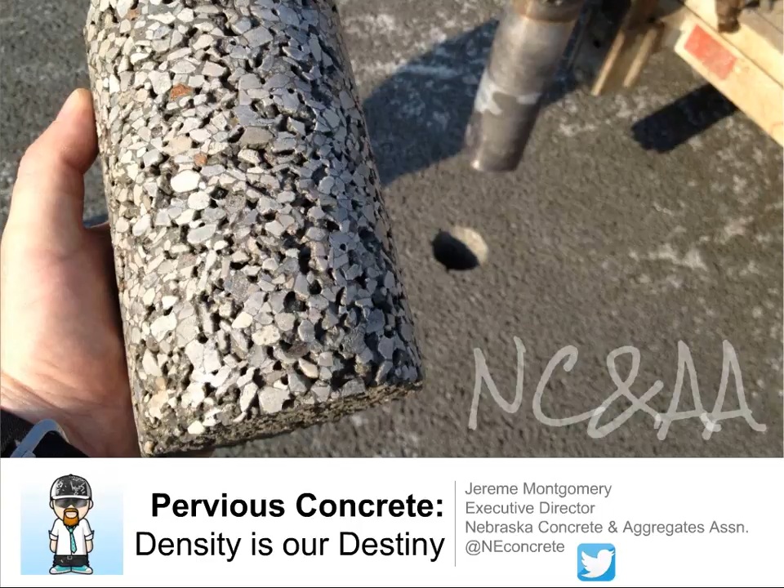Welcome to our webinar entitled Pervious Concrete, Density is Our Destiny.

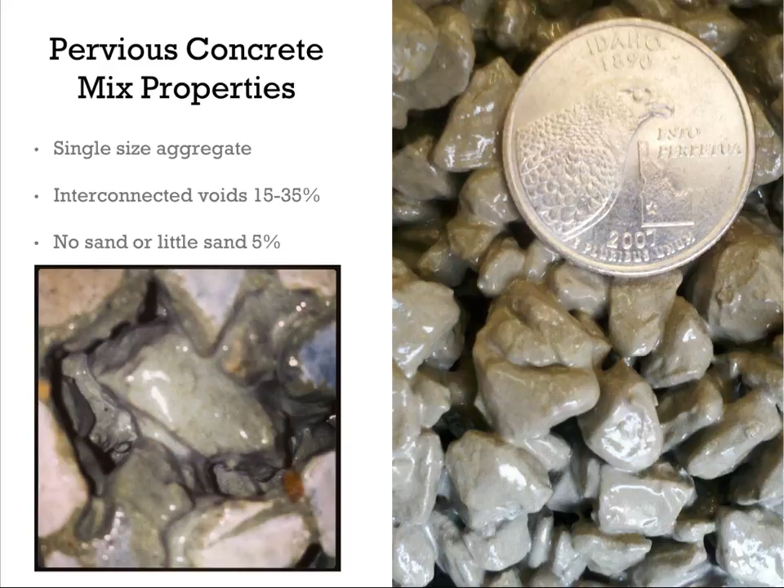So even at the same void content, you're going to have a different unit weight or density between a fresh and a hardened specimen, given the same void contents. And we'll talk about that here in a little bit. All right, so why is density so important to understand? Well, if you can control fresh density, you can control strength, infiltration, and in my own personal opinion, durability.

So in about 2007, I'm sitting in the audience and I'm listening to a guy by the name of Bruce Ferguson. Bruce Ferguson actually wrote the book on porous pavements back in 2005, and he's standing there, and I remember this slide very vividly, where he says pervious concrete is a balance between hydrological and structural properties.

And I sat there and I thought for a second, and I said, well, it's a real fine line there, and what he's saying is you want the pavement designed to be able to have water go through it, but not so much that you're going to lose the structural properties that are going to hold up traffic, be durable to turning tires, freeze thaw, all those different things.

So I think if Bruce and I were to meet today, I think what he was trying to say was density is our destiny. And I know that's a nice little catchphrase, but I really believe that density has a lot to do with the future of our market in pervious concrete. And as I talk to contractors here today, one of the biggest things I feel is important is that you understand what you're accepting when that truck delivers. And how do we understand what we accept and what we reject as far as the fresh properties go.

So pervious concrete isn't just a pavement. It's a stormwater management system. We use it in parking lots. We use it in sidewalks, trails, driveways, even behind retaining walls, all sorts of different applications. One of the main ones, though, is parking lots because, of course, it has the most square foot of impermeable surface, which takes all that rain and goes to the storm sewers. So what we're trying to do is treat it and retain that storm water on site by using it in something like parking lots.

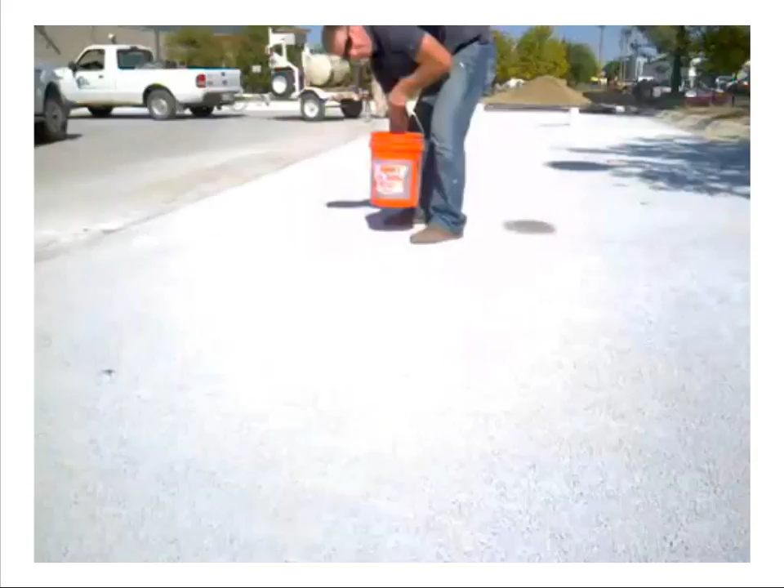I'm going to show this nice little video, and I'm going to actually play it twice. First time I want you to take a look at it because I know a lot of you out there have this vision and you've seen this YouTube video of a guy with a bucket of water and he pours it right on the pervious concrete and it goes straight through. Now I really think that's kind of screwed our industry because now this is what owners think permeable pavement should be. Almost like a drain. It should go right through it.

But I'd like to take that myth and challenge it a little bit. And here in Nebraska, what we like to do is sacrifice infiltration for density. We're going to get our pavements a little bit more dense, and we're going to sacrifice that infiltration. So when we build our pavement, go ahead, and here's the water. I'm going to pour it on there. And what I like to see is it dispersing and then kind of soaking into the surface.

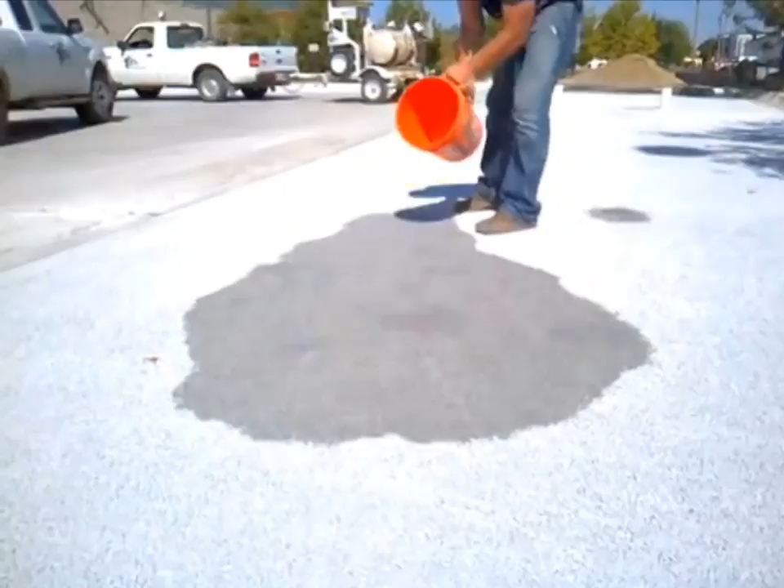And I know because we did an ASTM infiltration test at this location, and it measured about 300 inches an hour. But with that bucket going straight through the pavement, I guarantee you that's plus 1,000, maybe even 2,000 inches per hour. And I just don't think that those pavements with that kind of infiltration are going to be durable and withstand turning tires, freeze-thaw cycles, and all that other good stuff. So we've made a conscious decision to sacrifice infiltration for a little bit more of a dense pavement.

And again, I'll show you this one more time. And I really would have loved to show you guys a lot of videos, but I know with these webinars that gets a little bit tricky and sometimes may blow up in my face.

So this is the only video I'm actually showing today, and I wish I could show more, but nonetheless. So again, we're sacrificing infiltration for dense, durable surfaces. So if we can go back to the presentation, we'll go to our next slide.

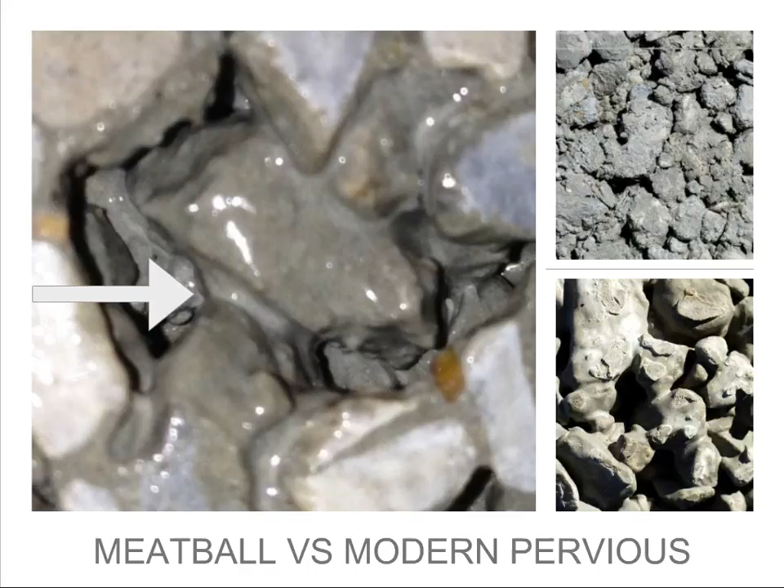And on that big picture there, that's actually a picture of a core I brought home from the testing lab, and I have it actually under the sink of my kitchen. And my wife walks in, and she's like, "What the heck are you doing?" And I'm looking for different things and clues, and I'm looking at that paste. Is it smooth? Is it the bond between the aggregates? Do I have this concave feature that's bonding the aggregates together? And that's an indication that I have good moisture, good hydration, which means a good glue holding all these aggregates together. All right, so that's enough about the mix.

If you're under 18 years of age, you can open your eyes now.

We're back on track. But what I'd like to talk about now is some construction techniques, some tools and the considerations that we take during the construction of these pervious concrete pavements. And if you don't have any experience with placing pervious concrete, you're soon going to learn that it's much like conventional concrete. You still have to place it. You still got to strike it off. You still got to finish it. Yes, I said finish it. Still got to cure it. Some of you may or may not know what curing concrete means. I'm a big cure guy. And of course, we still got to joint it and cut it.

And one of the things that I did leave out of that whole placement that's kind of like conventional is consolidation. We can't vibrate anything because then definitely we're going to get some clogged pores and the pavement may not be able to drain. So everything that we do with pervious is usually by weights or rollers, and I'll show you some of those tools here in a second.

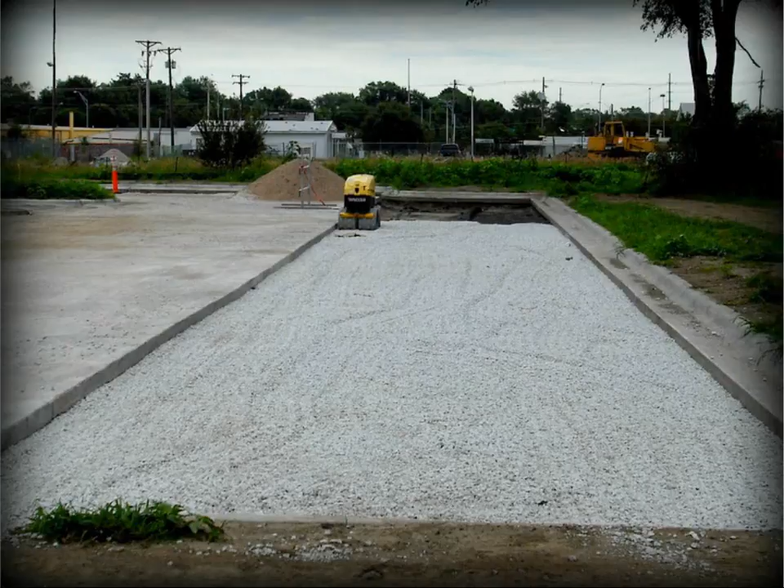When we talk about sub-base, subgrade, I try not to be too much of an expert on this because I'm not a soils guy, I'm not a sub-base guy, but what I do know is in Nebraska we use about an 18-inch rock base. And this rock base is kind of like your 57 stone. It has about 40% voids in it, and that 40% voids is storage area for stormwater before it has time to percolate back into the soils or go to an outlet.

But this sub-base, one thing that I've learned is it has to be uniform. It doesn't have to be strong, just a lot like conventional concrete pavements. We don't need strength in our sub-base, but we do need uniform strength.

And so 18 inches seems to work well for us. We started with about 12 inches. It seems because of the frost depth and stuff that just wasn't quite deep enough. And 18 inches seems to be the minimum depth that we use for our sub-base subgrade.

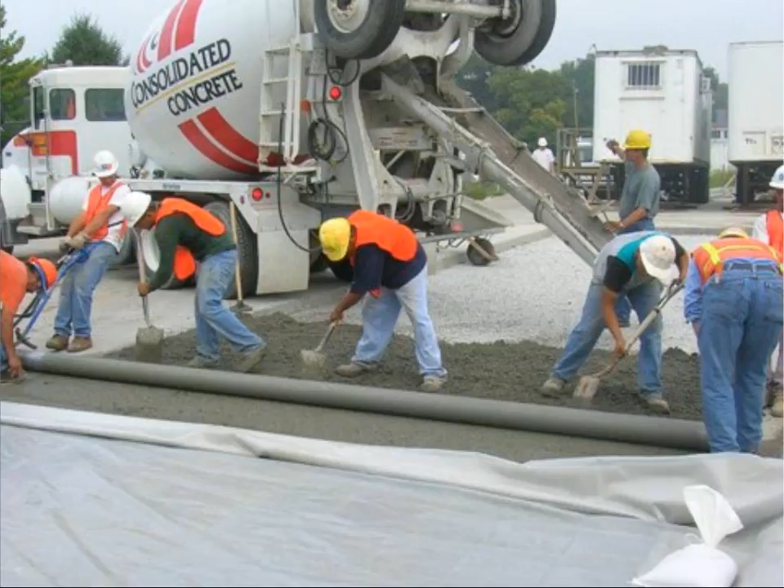On this next picture, I want to show and talk a little bit about the placement procedures. Yes, of course, you can put it out of the back of a chute, but it takes a little bit more time. The more chutes you add to the truck, the less of an angle you have coming out of the truck, and therefore the slower it's going to come out. I can tell you on this project, that guy in the yellow hard hat that's running the chute literally probably pushed 100 yards of pervious concrete out of that chute. So it can be done, although it's not one of my favorite placements of pervious concrete.

The other thing I don't like, if you look at this picture, I don't like those truck axles right on the edge of the conventional concrete. I really think that's putting a lot of stress and strain on that, and could lead to some mid-panel cracking due to loads. But we've also driven the trucks right on the sub base also, and done it out of the back of the truck as well.

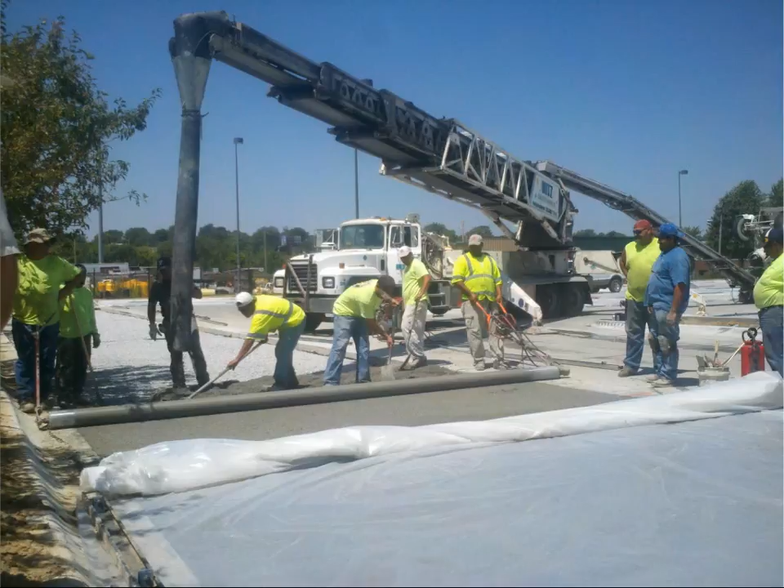My favorite placement method is with a conveyor. Of course, it's easy for me to say that. I'm not paying for the tab, but I've noticed our production has gone up when we use a telebelt because you're not worried about getting trucks in and out. As soon as one truck is done, the other one backs up and we're ready to go again.

The other thing I like about a conveyor is it actually is dropping it down about 15 feet. And that's getting a little bit more compaction, a little bit more of a dense material being put down versus out of the back of a truck where you're literally just pushing it down the chute and almost laying it down.

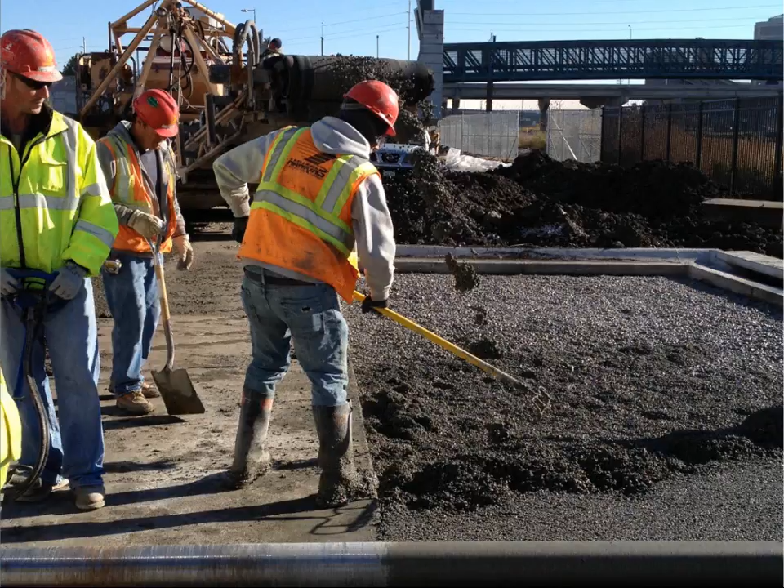When it comes to another placement, this is kind of a funny story because I attended this pre-con meeting where I told this contractor, well, I prefer a conveyor. And he goes, oh yeah, we got one of those. And I showed up the next morning when we were going to place the pervious, and he has this, what he calls, I think it was an MTP placer. It had an auger in the back. It was something I was completely unfamiliar with. It made me very nervous. But lo and behold, it actually was a very good way to place that pervious concrete, and worked out like a champ.

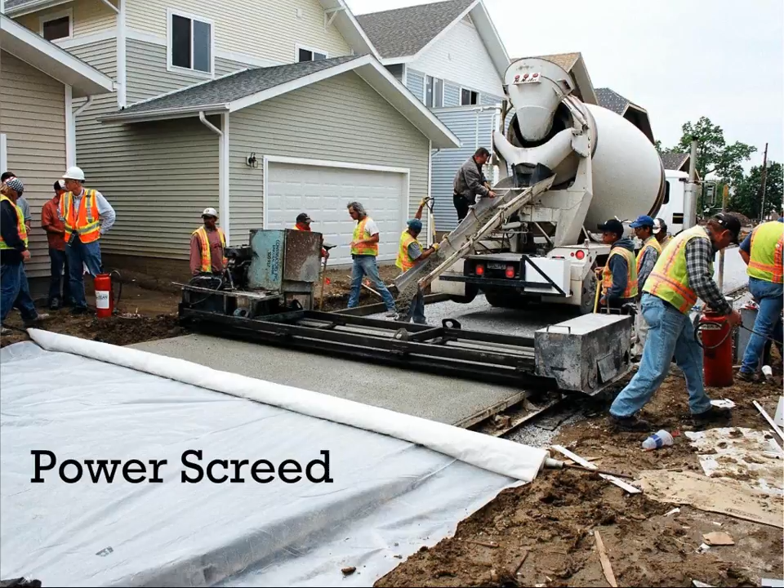Some of the methods of striking pervious off: of course, we can't use vibration, so everything we use is usually roller screeds. This is one of the first pieces of equipment we used in Nebraska called the power screed. It actually has 3 rollers on it, 2 rollers that sit on top of the forms, and the third roller, which is in the front of the screed, that's usually raised up 3/8 of an inch or so to knock everything down, and then the other 2 rollers literally compact by weight the surface of that pervious concrete.

One thing that you should notice here as well, with all the pictures that I'm probably showing today, is the location of that plastic, that curing membrane that we're using right behind strike off. Because this stuff has such a low water cement ratio, we have got to maintain moisture in the paste, especially at the surface of the concrete, to make it strong and durable. But that's what we call the power screed.

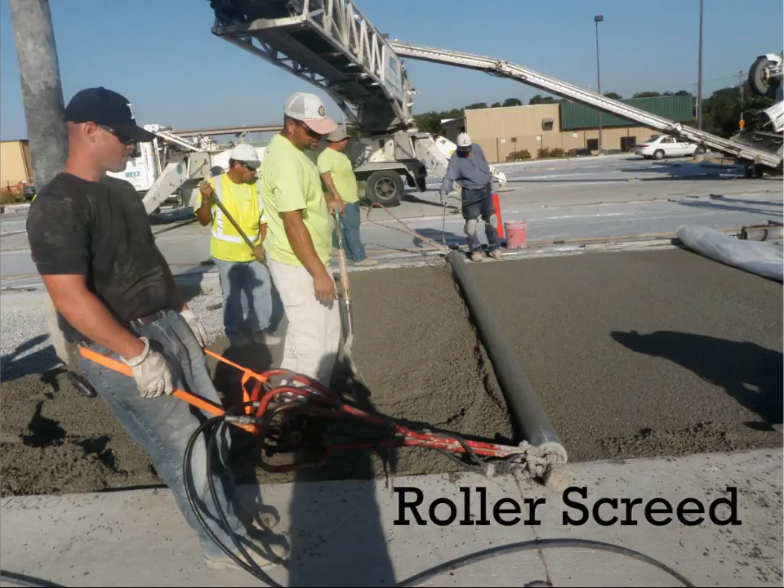Probably the most popular tool to strike off pervious is the single roller screed. It's a 6-inch tube, usually hydraulic, or I've seen some of them that are gas powered. You know, this roller as it goes, it's trying to get away from you and you're pulling it back. I kind of like this picture where these guys used tie downs around their waist to help them pull, because I've always said if you're going to have 2 guys pulling a 20-foot wide strip of pervious, you want your 2 big boys on those ends, because it'll wear your hands down by the end of the day.

But again, look where the plastic is. It's only 10 feet back from strike off. We're maintaining that moisture the best that we can.

And I wanted to put a little bit of something in there about edge work. We can edge it. I've edged it with a 1/2-inch edger. You need these mixes to be a little bit smaller with the aggregate size. And one of the things that I try to communicate to these crews is if the pervious concrete mix is sitting in the curb, don't put it back in the mix. Once it's out, it's out.

I always bring back shovels of a little bit of fresh pervious to work that edge. But once it's out of the edge, don't ever put it back in. It just seems like those edges end up being dry and end up raveling. But you can edge it with a 1/2-inch edger, but our mixes are about that 3/8 minus, which is a lot of 1/4-inch aggregate. I think when you start getting into the 1/2-inch aggregate, then it's really tough to put a nice 1/2-inch radius edge on that.

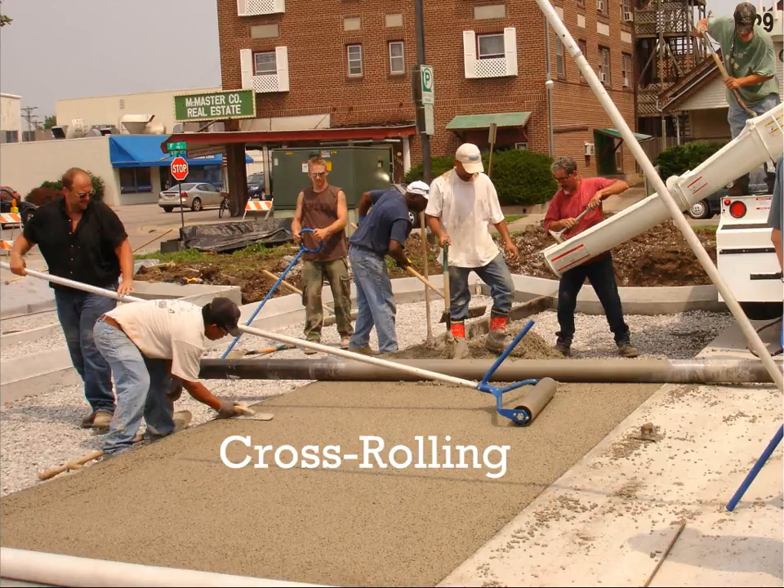Cross rolling, this is a tool that we use that's typical with, I call it the bull float of the pervious concrete world. When we first started cross rolling, we would do it to remove the lines of the roller screed, and we did it before the plastic was down so we can see everything. But the mixes that I've used are pretty sticky mixes, so they have a tendency to stick to the tools and whatnot. So a lot of the cross rolling that we do now is right on top of the plastic, which seems to work really well.

One of the side effects of this is the guy running that cross roller really has to ensure that he's doing everything he can to cover every square foot of this, because you can't see your roller lines. You just got to make sure you're being consistent with that roller going down the line. But again, look at where that plastic is, right behind the roller. Just doing an excellent job maintaining moisture.

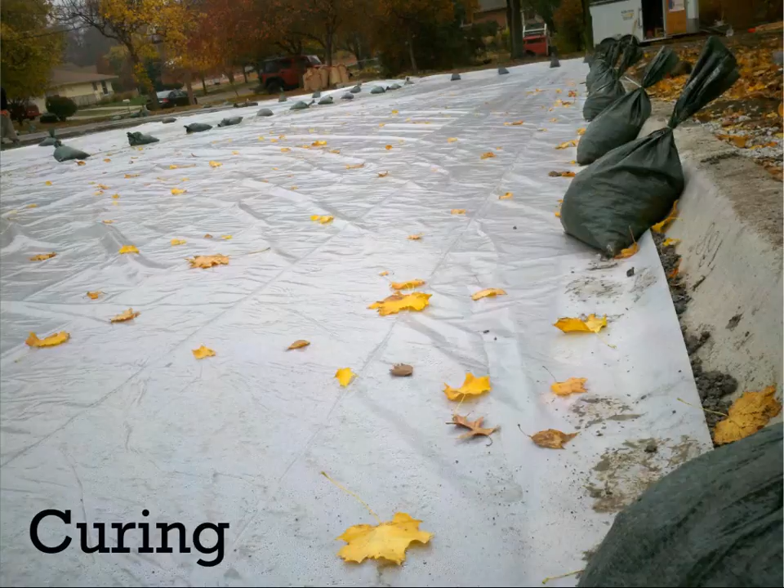Curing. Now, if we were talking about conventional concrete, I'd have to go on a whole new hour webinar on why it's important to cure concrete. I'm just a big advocate of it. I think one of the basic fundamentals of placing even conventional concrete is maintaining moisture and maintaining temperature. Now, when you're talking about pervious concrete, our mixes have around that 0.35 water cement ratio, so it's extremely low. If I want that paste to be a strong glue that holds these aggregates together, I have got to maintain that moisture at the surface, or moisture throughout the mix, not just the surface.

But one of the things that we do in our pre-construction meetings is we discuss how are we going to hold this plastic down for 7 days. Because 7 days is a long time here in Nebraska. It's pretty windy. So we got to make sure that we're doing everything that we can to hold this plastic down to make sure that it's not going to blow around and dry out the surface of our pervious concrete.

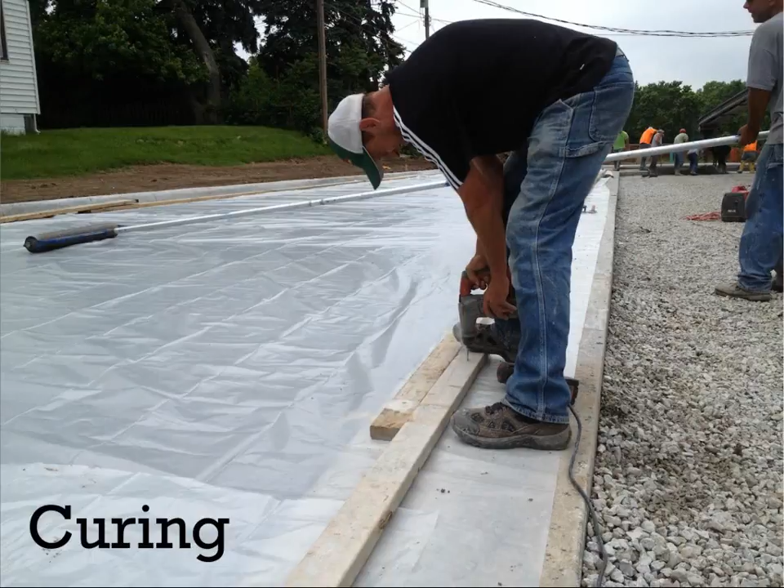What I expect now from my crews, I should say the crews that allow me to come in and guide them, is that I require a mechanical fastening of this plastic. Because even with sandbags, it becomes extremely challenging to keep that plastic from acting like a parachute. So in the last few projects that we've done, we actually came back before we were done placing and mechanically fastened that plastic down. What he's doing here is a header curb, but the integral curb, header curb, wherever you got to fasten it down to, let's make sure we're keeping it down for 7 days.

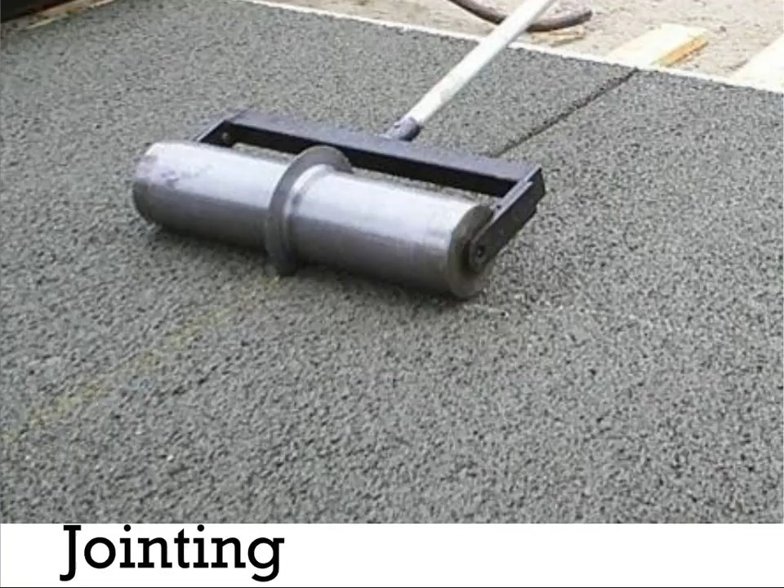Jointing. Now, this little tool here is my arch enemy. I do not like the jointer. This is what we call the groover or the pizza cutter. We were using this to hand groove our joints in pervious concrete, I would say probably 2006 and 2007. And again, we just haven't had the durability out of these joints using this jointer like we do with a saw cut. But back in 2006, 2007, I had a lot of people doubt whether or not you could actually saw cut pervious.

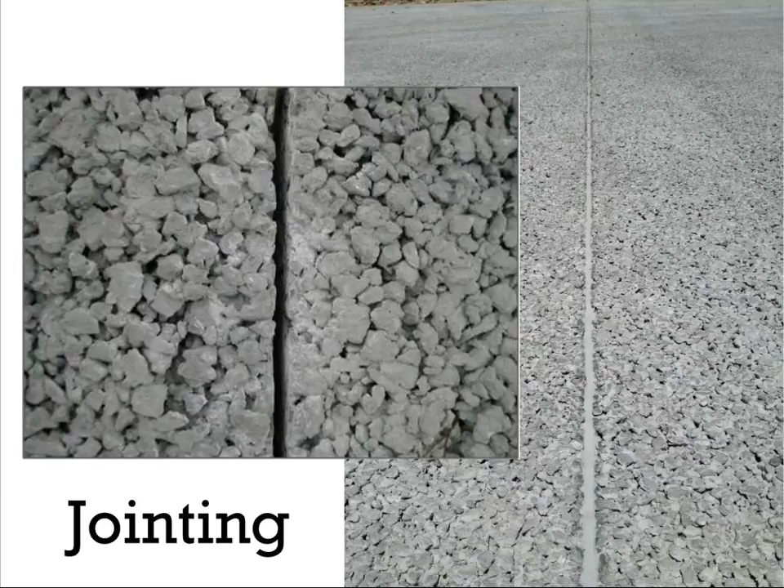But since 2007, we've actually done a great job with saw cutting pervious. The question becomes, at what time do you cut the pervious? Because remember, we've got that plastic down. We want to hold that plastic down for 7 days, not let the surface dry out. So do you come in a couple days later, uncover it, then cut? Some of these times we've actually waited 7 days before we cut, but it was a little cooler outside and we thought we can get away with that.

Another thing that you see in this photo is something very unique, is the sealant. I used to have a picture where I did these box lunches. I used to make fun of this picture, pervious concrete with sealed joints. I just thought it was the funniest thing, the biggest waste of money I've ever seen. But there's two reasons why we seal joints. One is to keep out moisture, which is ridiculous for pervious concrete. And the second reason is to keep out any kind of incompressibles.

And especially with pervious concrete, as you take that saw blade down there, you're going to have thousands of little rocks that are just kind of hanging on there. And you don't want those falling down, thermal expansion, thermal contraction, just eating away at that joint. So our detail now is to saw cut and to seal the joints. And I will tell you that it is a night and day difference from grooving those tool joints to saw cutting and sealing them. Just a dramatic difference in durability.

Now, in the defense of the groover, this was still back when we were still using very dry mixes. What I hear nowadays is people using the wet mixes and using a 3 mil plastic that goes over the top and grooving it over the top of the plastic. And it seems to be working real good. I would like to use the groover on some of the mixes that we've developed recently because they're a lot more workable and probably a lot more durable today than I gave them credit for in 2007.

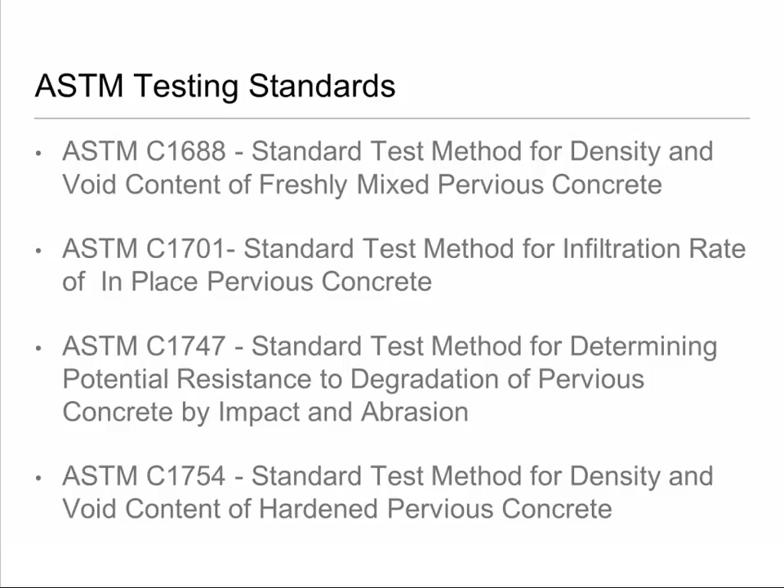But is this telling us what we're placing in the field? And my answer is no. It is not testing the density of what we have in place or the void content of what we have in place. It's only telling you the density or the unit weight per the standard. So per the standard meaning 2 lifts, 20 blows per lift, striking off, weighing it. It is not a representation of what we're putting in place, just per the standard. Here is a picture of ASTM 1701, the old infamous infiltration test.

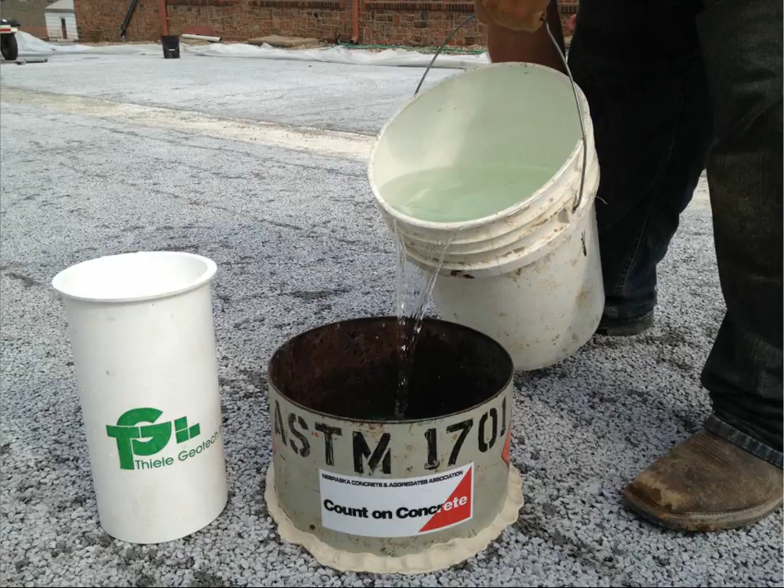This is a test. It's a 12-inch ring. You do a pre-test; depending on how fast it infiltrates on your pre-test, that dictates how much water you use on the actual test. We've done a number of these. I really like to see somewhere in the range of 250 inches an hour all the way to 750 inches an hour. I think when we start getting higher than 750 or 1,000 inches an hour, we're just talking about a very high void content slab, which is great for hydrological purposes but may not be so good for structural purposes. So there you go with ASTM 1701.

Something else with this 1701 test, a lot of people don't understand that it is not a test for acceptance. So let's say we ran this test and it showed 50 inches an hour. Do we accept or reject based on this test? No, we don't. We use it as information. What we do here in Nebraska is for every 5,000 square feet, we'll go do 3 of these infiltration tests on a brand new slab.

We'll document where we did that in the slab. And then 3, 4, or 5 years down the road, we can actually do the same test in the same location to understand how much infiltration we've lost, when maintenance is going to be needed, and so forth. So we use it for information purposes, not for acceptance.

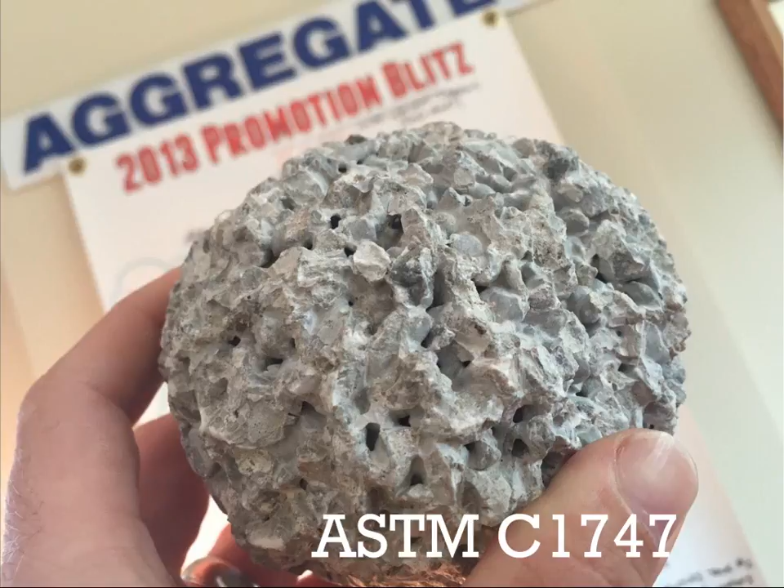ASTM 1747 right here looks like a popcorn ball. We've run this test twice with our basic mix, which is just rock, cement and water and some admixtures. But again, this is not an acceptance test. We've run 2 of these tests. As a matter of fact, I have Terracon right now with my 3rd set of specimens to run this test.

And basically you take 3 specimens that are 4 inches tall at exactly 20% void content. You tumble them in an LA abrasion machine, and you really just beat the snot out of them until you go through 500 revolutions. You measure mass loss, and our specimens have about 35% mass loss. And everybody goes, well, Jeremy, that's an awful lot of mass loss there. That can't be a good mix.

Well, in the future, when we start adding fly ash, fibers, silica fume and all these other types of value-added products, we'll be able to do this test again to see how much tougher those value-added products make this mix. Think of our mix right now as just the basic standard mix, and it can always be improved on, but we're not quite there yet. But this test is not for acceptance. It's just more for information, telling me how tough my mix is.

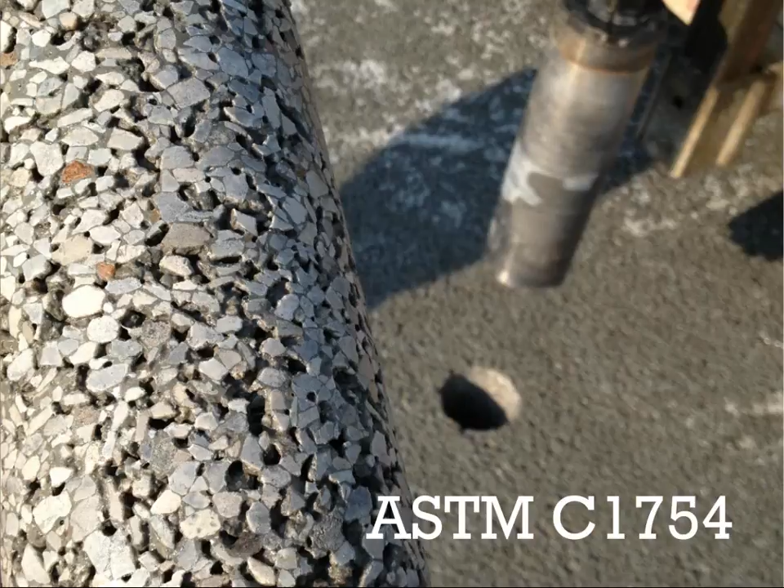And then, of course, another disclaimer for anybody under the age of 18. Again, close your eyes. This is more concrete porn. Matter of fact, if this was in a magazine, it would absolutely be the centerfold. I have this poster on my wall of this exact picture because I call this the money shot.

It's ASTM C1754, testing the hardened density and the hardened void content of pervious concrete. And this is one of the things in Nebraska I take a lot of pride in. I feel like we are one of the only ones that can prove we are predicting in-place void content. If you want 20% void content, we can place 20% void content given tolerances, pluses and minuses, but we can hit it pretty good, and I'm going to explain that in my quality control segment.

But again, ASTM 1754 is only a few years old, so we need more people out there running these tests so we can get those ASTM committees some information on how we're doing in the field. So a lot of people also ask me, well, Jeremy, how do we accept pervious concrete when that truck shows up? Well, in accordance with ACI 522.1-13, meaning it came out in 2013, a relatively new update to the specification.

And just so some of you know, I actually do sit on this 522 committee. When people ask me for specifications, I always direct them to ACI 522 because it's a group of people that sat in a room for years, literally years, and argued about every little word, every little tolerance, every topic in these. And it's from academia, contractors to producers, all coming together to create a specification, and you just can't get any better than that.

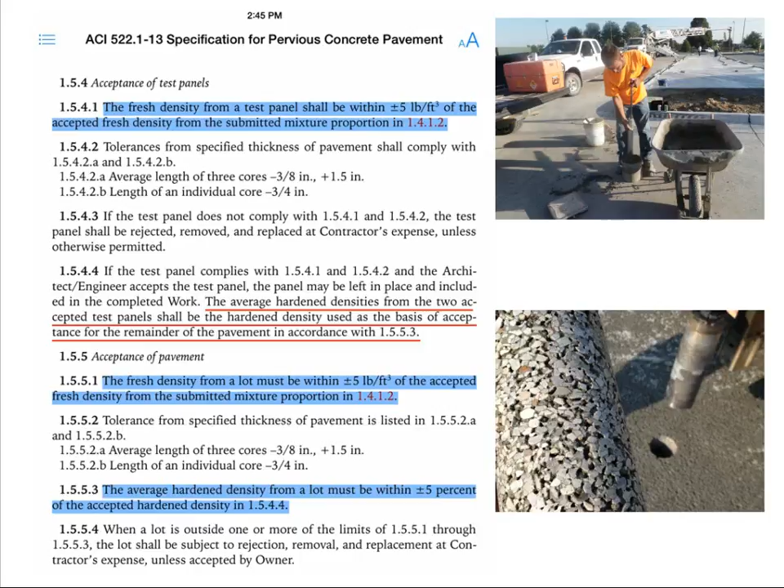So our QA/QC program here in Nebraska is a little bit different. I actually require a lot more than what ACI 522 requires. If I can get my foot in the door soon enough, I require a pre-bid meeting, and I sit in with 5 or 6 contractors that are bidding on the project, and we talk about, how are we going to hold the plastic down? How are we going to place it? Maybe you should bid it with a telebelt. Maybe everybody should bid it with a telebelt, because I think it's just going to be a little bit easier to place, your production better, and I think you're going to actually end up saving money when it's all said and done. But in the pre-bid, we also talk about 522 and what the responsibility is of everyone.

We also talk about the importance of curing and keeping that in there. And actually, I probably have these two mixed up. I probably should go pre-bid, then the mock-up, then the pre-con meeting to talk about all the tolerances and the unit weights that we need to achieve in the field. And then per 522 specification, it only requires 1 fresh unit weight test per placement. And we test every single truck.

And I know to do this because a lot of you guys know when you're ordering a conventional concrete and you want a 5-inch slump, you can kind of tell what that 5-inch slump looks like because you've seen it over and over and over again. If I'm trying to hit a unit weight of 130 pounds per cubic foot, nobody knows what that looks like. So you have to run the tests on every truck to build confidence in what you're actually accepting as a contractor. And then once the project's done, we go in, we take 3 cores for every 5,000 square feet. We do 3 infiltration tests, the 1701 tests, for every 5,000 square feet.

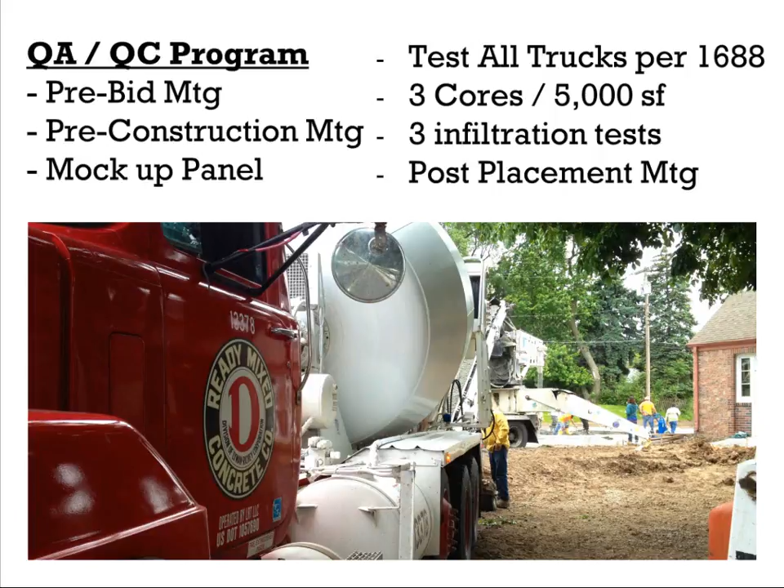And then when it's all said and done, I require a post-placement meeting where I get everybody back in the room and we talk about what we used for acceptance. Did we hit our numbers? What were the hardened void contents? What were the hardened infiltration tests? So that everybody learns a little bit. What I hate is going through all this dog and pony show and then nobody learns anything at the end of the day. So I do require a post-placement meeting just to ensure that everybody learned a little bit.

This also is an excellent picture. I just got done telling you that every time that truck shows up, we do a unit weight density test per ASTM 1688. And then I take that weight and I go to the curb and I write that weight down right on that curb, somewhere where the middle of the load is.

I'm not getting too scientific, but about the middle of that load, I'll write down what the fresh unit weight was, or fresh density, and then when we go core that, we can refer back to what the fresh density is so that we have excellent correlation between fresh density and hardened density because, again, they're going to weigh different even at the same void content.

All right, let's get into some projects, probably what you guys have been waiting for this entire time anyway. Metropolitan Community College, we started this in 2009. There were 3 strips of parking stalls, probably a little over 3,000 square feet. The designer was HDR, which is a national firm, big one for us. There were a lot of eyes on it.

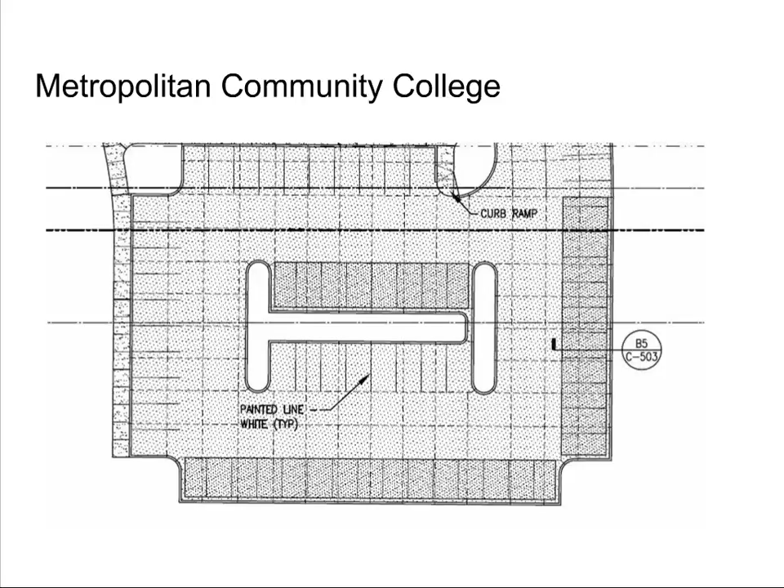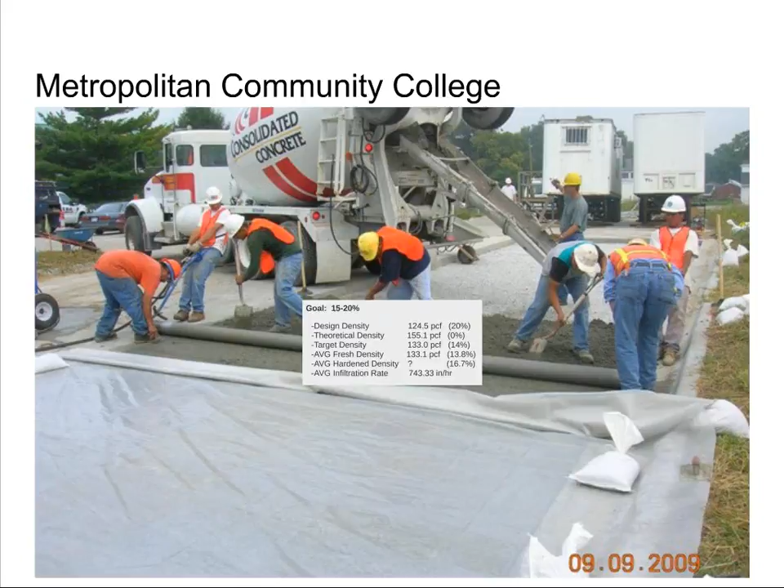And I can tell you right now, our goal, sitting in this meeting, in front of the designers, the owners and the contractors, I said, we're going to hit between 15 and 20%. At this time, I really didn't know what was going on. I just knew I wanted a dense pavement. I was tired of seeing all these real open, high infiltration slabs. I said, we're going to shoot for 15 to 20.

And then we had our design density on paper, 125 pounds. Our target density on the 1688 was 133 pounds, which is about 14% voids. And again, that's 2 lifts, 20 blows per lift, striking it off and weighing it. That's not telling you what you're placing.

I assumed we were going to gain voids, since we're not going out in the field and giving that 6-inch slab 40 blows, 20 blows per lift. So I assumed we're going to gain voids. But we didn't know at this time if that was really true or not.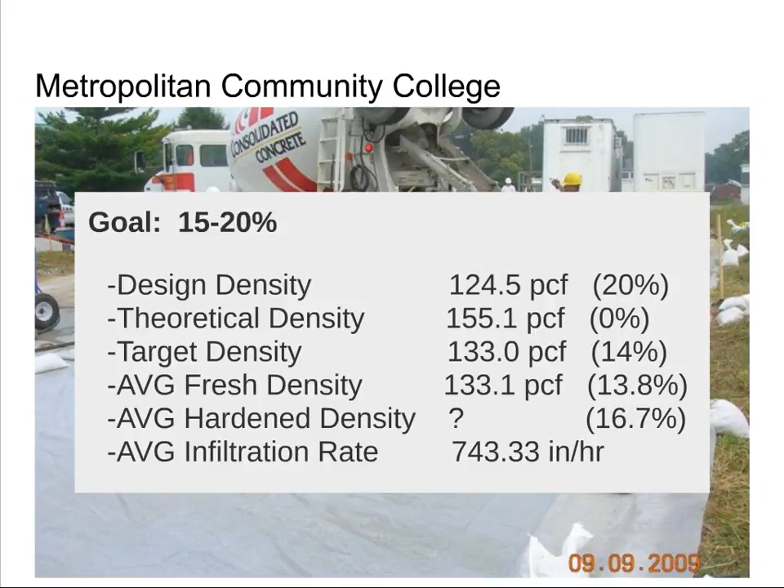After it was all said and done, the average hardened density, which I don't have the pounds per cubic foot, but I do have the void content, was 16.7% voids. There was one core in there that was down to 12%, which is almost conventional. And there was one that was around 21%, but it averaged out of 6 cores 16.7%. And had a pretty good infiltration rate. I know there were a couple in there at 1,000 that kind of skewed our number a little bit on the high end, but 743 is the average of the 6 infiltration tests.

Moved on to Sarpy County Sheriff's Department. Funny story here. This old boy, I showed up and he had one of those Texas screeds. I think you guys call them Texas screeds. I call it a truss screed. But he had one of those with the roller screed, and he was going to strike it off with the Texas screed and then come back with the roller. And I said, get that truss screed out of here. You don't even need it.

Of course, he's saying, well, that's not what I saw on the internet, and that old joke. Every time I see that commercial of it's got to be true because you heard it on the internet, I think of this old boy.

But we went round and round and exchanged some words, and good thing his truss screed didn't even start up. He couldn't get it fired up, and had to use the roller screed, and it was all good. And by the time we were all said and done, we were hugging and kissing each other, so we were all happy.

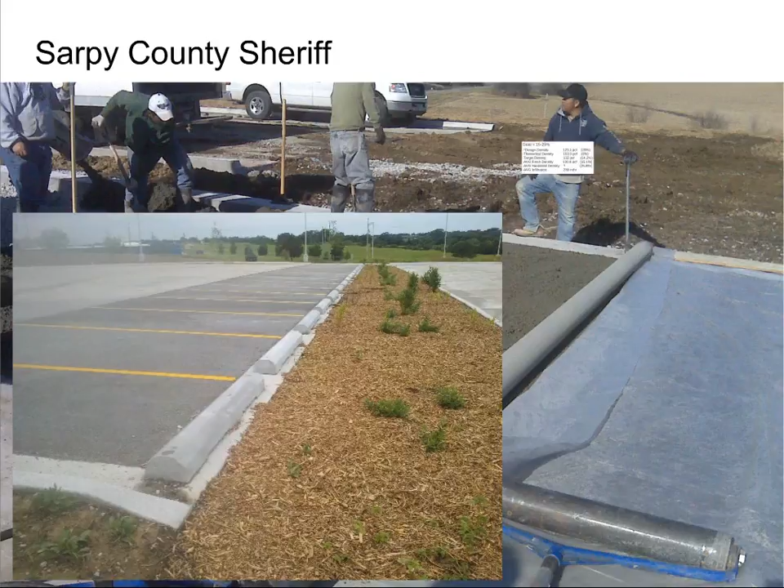But I didn't get to have a pre-con, a pre-bid. I heard about this project literally 2 days before it went down, so we didn't get everything that we wanted. But still, we got to run unit weight tests. We got to run 3 cores from the slab, and we ended up with 25% voids. And that's pretty high voids considering that we were averaging 15% voids or 130 pounds on the fresh density.

So what I look at is we gained 10% voids from the 1688 test to in place. And that struck me, as I was imagining more like 20% instead of 25, 26. But we didn't place this with a conveyor either. It was straight out of the back of the truck. So we weren't getting any compaction from the pervious concrete dropping 15 feet in the air. Average infiltration, 239 inches per hour.

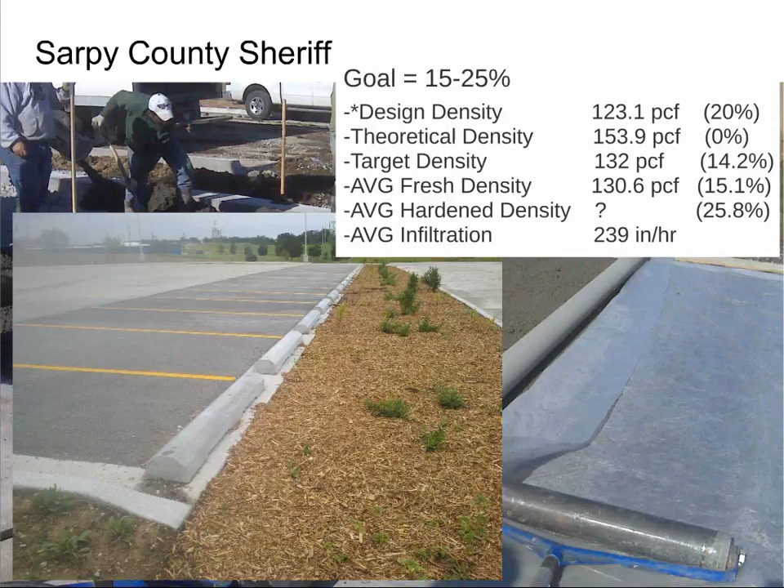And lots of numbers here, lots of data, but I'm just trying to show you guys that when we do a pervious project, it's all hands on deck. And we're trying to collect every piece of information that we possibly can to help us make better decisions on the next project. So here's UNL parking garage. It's a mix with some pea gravel, with some pipe rock in there, a little bit larger aggregate than what we were used to with the first few projects.

One thing I want to stop here and look at is that header curb going right down the middle of this slab. We do that because, and I used to get a lot of slack for this because it was added cost, but we're saving money because I can place one strip in the morning and just jump right next to it when we're done and do the next strip next to it. So just by spending a little money on that header curb, we're able to place something that's more than 20 foot wide, because the only width I would recommend pulling on that roller screed is 20 foot wide. So we break that up with a header curb.

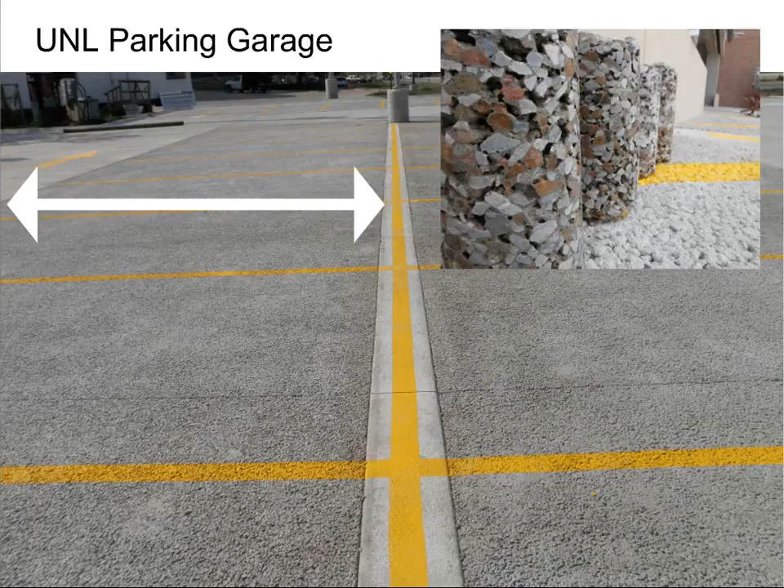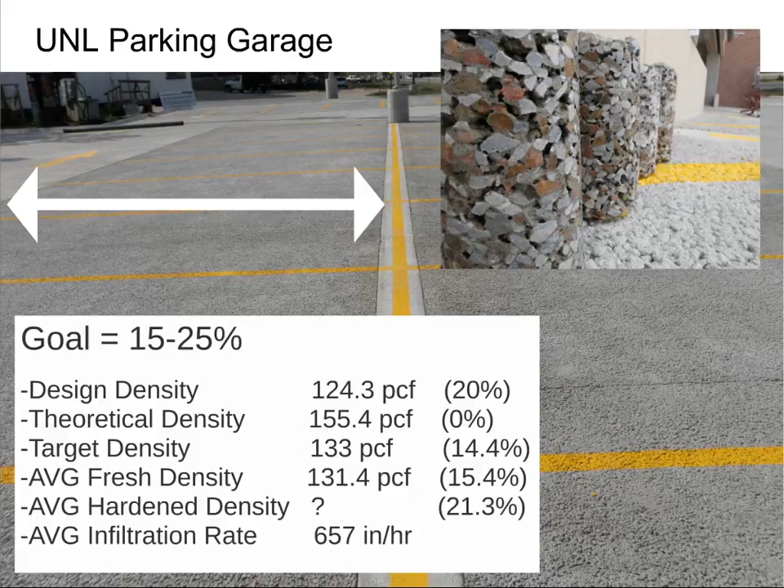But again, this project ended up with, we averaged 131 pounds, or about 15%. And on the hardened density, again, we didn't have the ASTM hardened density test yet, so all I was getting was void contents, and we averaged 21% voids. So we gained 6% voids from the 1688 test to in place and averaged 650 inches an hour, which is great.

Then Southeast Precinct came along, and up to this point, I started realizing that all my producers were using different mixes. So was all the data the same, or was it all different? What did it all mean? So I developed a baseline mix on my own, which is basically 500 pounds of cement, 2,700 pounds of rock, and a 0.35 water cement ratio, with some admixtures in there to make it all work.

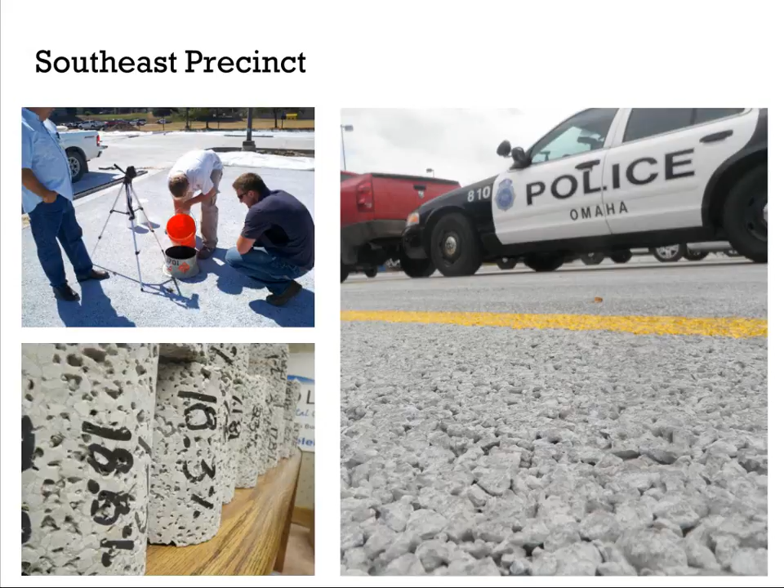But on this Southeast Precinct project, we started this mix, what I call a lean mix at 500 pounds, and took the 17,000 square foot parking lot and extracted 21 cores, because I knew we were onto something as far as being able to predict in-place void content. And if I'm trying to hit 20%, my goal is how close can I get to that 20%, and how many times can I do that?

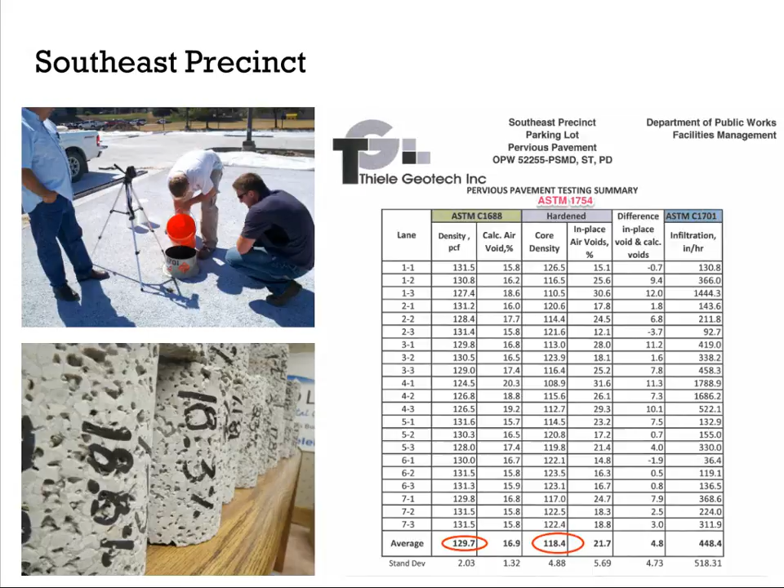So out of these 21 cores, you can see at the bottom, we averaged a fresh unit weight on that 1688 test of about 130 pounds, and we ended up at 21% voids, which was about 118.5 pounds. So right now I can tell you, before I even mock up, my dry or my hardened unit weight is about 118.5 pounds per cubic foot. That's what I'm trying to achieve in the mock-up and in place. And you can even see here we averaged 4.8% voids from the 1688 to in place. So now we are literally able to predict an in-place void content utilizing fresh unit weight.

Terrell Park. This is an interesting one. Look at that plastic, man. That's a beautiful picture. All them sandbags, keeping that plastic down, retaining that moisture.

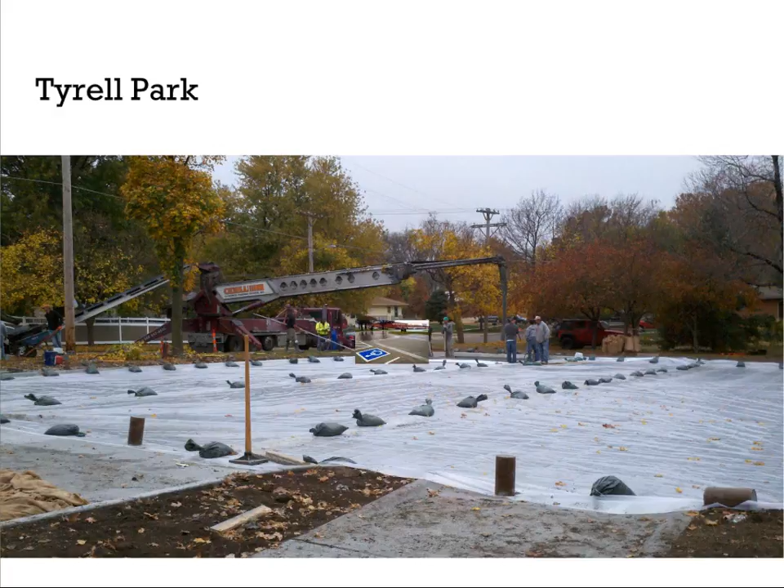And this is an interesting project because it's literally across the street from a middle school that both of my kids, well, one attends now, the other one will attend in a couple of years. But I told the contractor, I said, do not screw this one up. I have to see this every day. I literally come down this street and turn around in this parking lot during the school year every morning. So I'm able to analyze and see what it's doing.

Here one morning, it was raining real hard, so I took a nice little picture. Again, notice those header curbs. This was 60 feet wide. We broke it up into thirds, used those header curbs, and we poured the whole dang thing in one shot.

But as far as the densities, again, average fresh density, 129.9, that was our target, and we averaged about 26% in place, which seems a little bit high to me, but again, doing it out of the back of a truck, you're gaining about 10% voids.

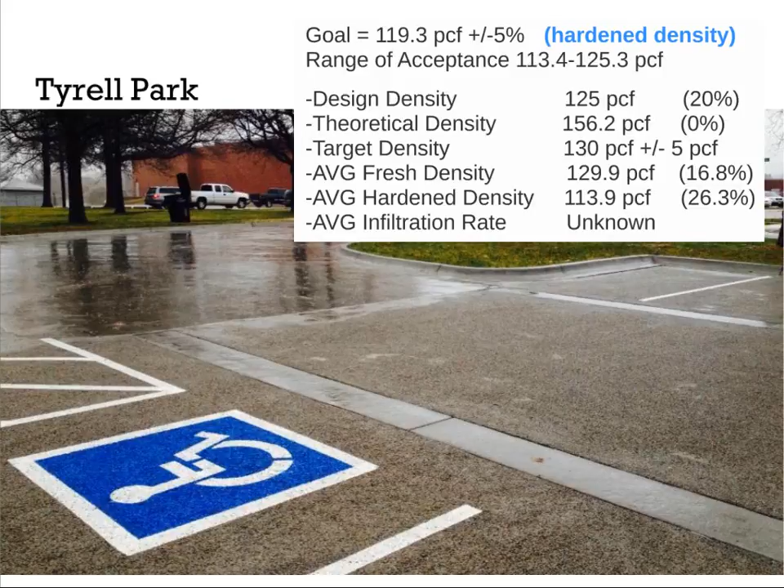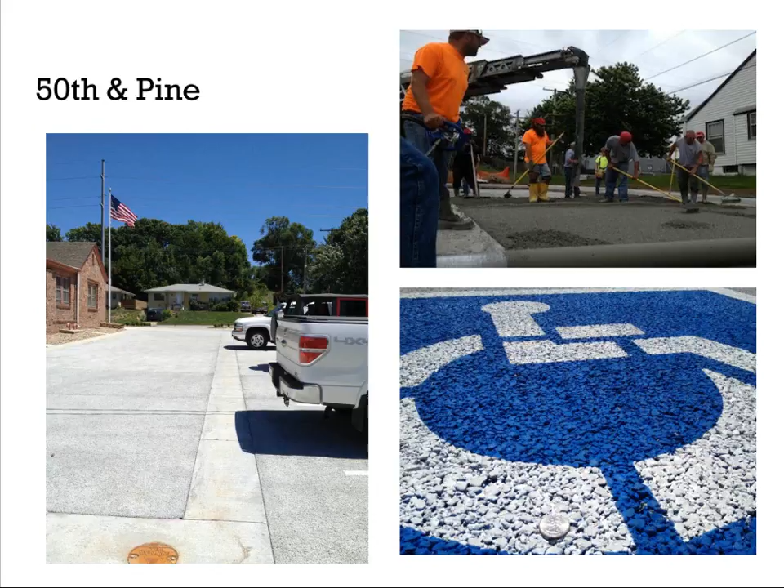But again, header curb right down the middle, poured the whole thing in one shot. And some of the tests that we had on this one, again, we're using the same mix that we started off with Southeast Precinct. 130 pounds we averaged on the fresh density, ended up at 119 pounds or 21.9% in place. So again, I'm trying to hit around that 119, 120 pounds in place. I know that just because of all the data we've collected.

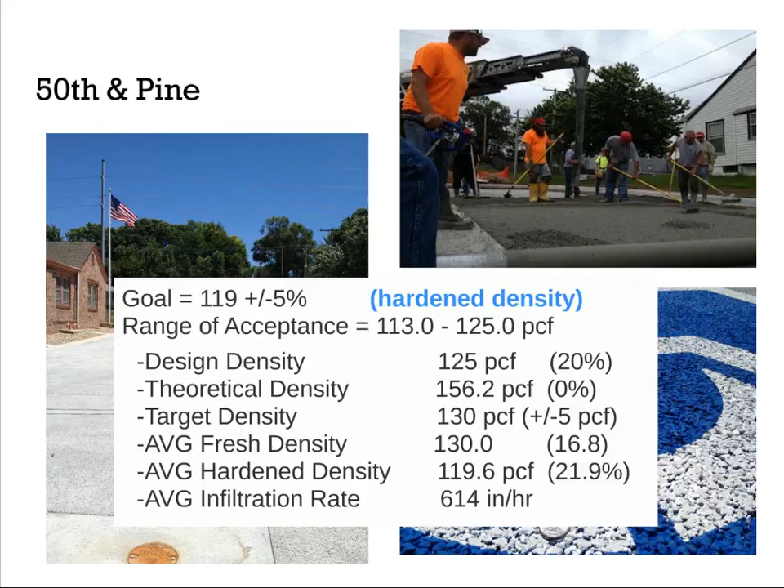I don't really even need a mock-up anymore to indicate to an engineer what my hardened unit weight needs to be and what that tolerance is, because I actually have 5% from that 119, which is 113 to 125 pounds, and average about 600 inches an hour on the infiltration.

When it comes to maintenance, this is wrapping it up with one of my last slides on the maintenance. One of the biggest drawbacks to any permeable pavement is these owners don't have a maintenance plan. I've got about 12 specified projects here in the Lincoln and Omaha area. Not one owner has the equipment to maintain their pavements. That's a problem, or it's going to be a problem if we don't try to adhere to maintaining these, or at least communicating to the owners that it's time to maintain these parking lots.

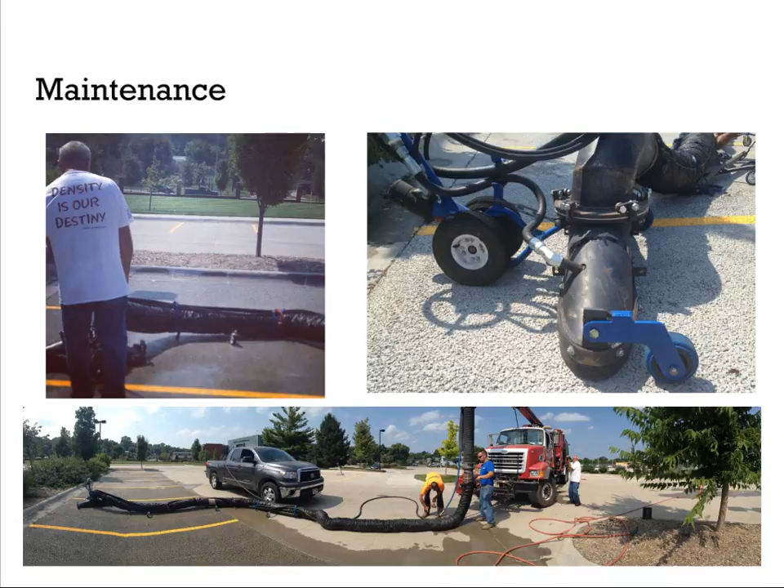But when it comes to maintenance, there is a maintenance to these permeable pavements. We've got to figure out what it is and some of the best equipment to use. I've used pressure washers that worked really well and revived them like they're brand new. The question is, how many times can I do that before it's not infiltrating at all? Is it 10 years down the line? Is it 20 years down the line? That's just some information that we're going to have to share here as time goes forward.

Now, I know that's a lot to take in, especially from a contractor's point. A lot of that density stuff I know you'd probably like to push off onto the producers. But as contractors, I think you guys really need to understand what you need to accept and what you need to reject. Because with this new type of a product, it's important that we protect it. And we do everything that we can to collect data to make us have better decisions in the future.

So with that being said, I think we'll open it up. I got one question on here that somebody had asked. Is pervious concrete feasible in a hot, dusty, windy desert climate, such as New Mexico? Because of the more constant upkeep, sweeping, vacuuming, and pressure washing. And I agree. I'll give you an example.

Here in Nebraska, we've got a 4-foot strip of pervious concrete down the middle of a 50,000 square foot parking lot. And that brings in a lot of contaminants, a lot of fines into that. And I just call it a high maintenance design. And I think depending on where you're at, how dusty is it, I don't know if I can really answer that question, but maybe it's just more of a higher maintenance type of a pavement. But I do have a connection down there in New Mexico, and I know they use pervious, so I guess I don't know if I can answer that question too much more.